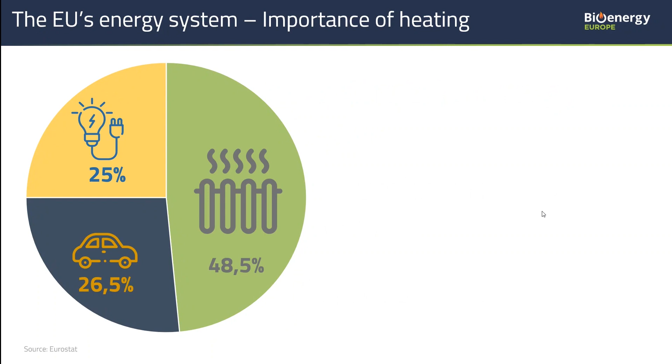The first point I'd like to make is about the importance of heating in our energy system. So, when we talk about decarbonization, the emphasis is often put on electrification and on the decarbonization of our electricity consumption. But half of our energy is actually used for heating, which underlines how important it is to decarbonize our heating sector if we want to achieve a carbon neutral energy system.

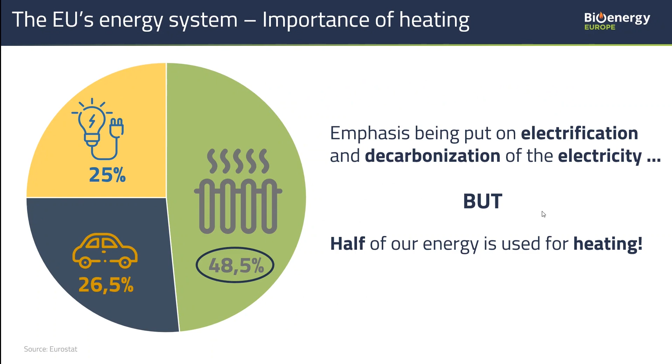Now, using this same pie chart as a central point for my next slide, I would now like to go over the current state of our energy system, meaning which fuels we're currently using to fulfill our energy needs. And these are represented by the outer circle that just appeared on the slide. And here, the darker grayish color represents non-renewable fuels, so oil, coal, natural gas, and nuclear energy.

The green color represents bioenergy in all of its forms, so solid biomass, liquid biofuels, as well as biogas. And finally, we have the light blue color, which represents all the other renewables combined, but this category mainly consists of wind, solar, and hydropower. I really like this slide because it underlines the versatile role that biomass plays in fulfilling our energy demand.

Now, if we'd like to quantify our energy system, I'm going to start with the heating and cooling sector. And there, fossil fuels are used to fulfill close to 80% of our needs, while bioenergy covers nearly 20% of our total heating demand, or 84% of the renewable mix, while other renewables cover around 4% of the heating demand. This underlines the absolute key role that bioenergy plays in the EU heating sector and how trying to leave bioenergy out of any realistic heating decarbonization strategy is totally impossible. Here on the right-hand side of the slide, you'll find a summary table with the contribution of each source to the mix.

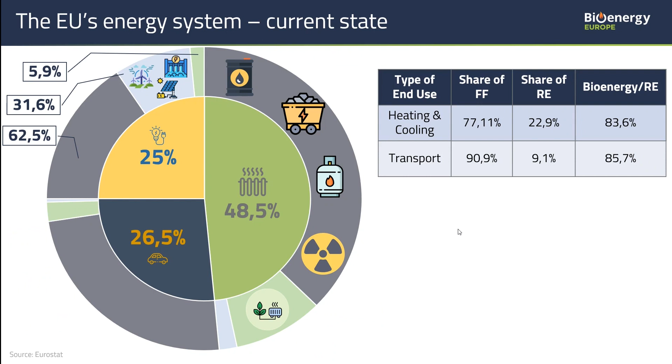And finally, we have electricity, which is the end use for which renewables represent the larger share with around 37.5%, while biomass represents around 15.4% of the renewable mix. In 2021, when considering all of these end uses combined, we see that bioenergy represents 55.7% of the renewable mix and is therefore key for all types of end uses.

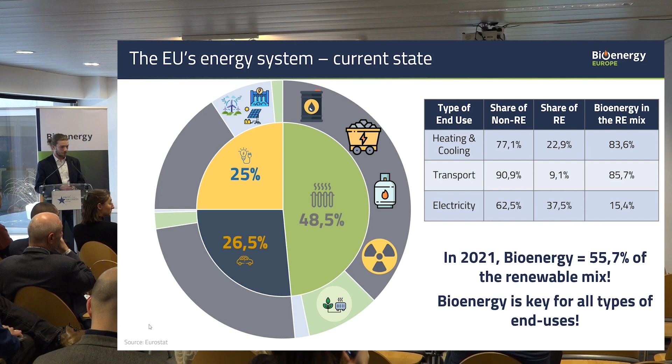I don't have to describe in a lot of detail the energy crisis that we just faced. I think every one of you is aware of the problems that we have, and also highlighting the need to have an independent energy system in Europe. And so here on this slide, you can see the evolution of the indigenous energy production for the main fuels that we use in the EU. The gray and darker colors are fossil fuels, so coal, gas, and oil. The red one is nuclear energy. The yellow are all the other renewables. And finally, green is biomass.

The first thing that we see with this graph is there is a general decrease of indigenous energy production from fossil fuels starting in 2005 already. As you can see, all of the 2021 values are below the 2005 values for most of the non-renewable fuels. And the tendency is the opposite when it comes to renewables. As you can see, biomass grew quite nicely, as well as other renewables.

And there are two important dates on this chart. The first one is 2009. As you can see, in 2009 already, indigenous biomass production overtook indigenous natural gas production. And the second one is 2016. It's in 2016 that indigenous bioenergy production overtook indigenous coal production.

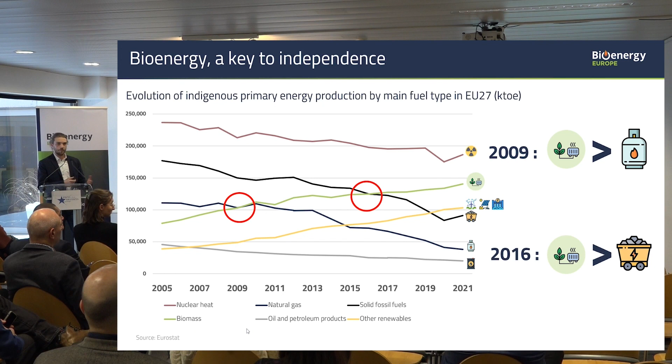And now if we'd like to put this into perspective with our energy consumption, because here we've mentioned the production, we have another representation for this. I know this is quite a packed chart, so let me walk you through this. The colored bars here represent our energy production, and the gray bar in the background of each represents our consumption. And as you can see, the difference between the two is basically our energy dependency.

And when we look at the first two bars, which are oil and gas, we can see that our production is largely outmatched by our consumption. For oil, for example, we are 92% dependent on our oil consumption. We are 83% dependent on our gas consumption. When it comes to coal, we see that we have a much higher primary production in Europe, but still outmatched by our consumption, making us 37% dependent on coal.

But the important part is now the last bar, the bar on the right, representing biomass. Here you can see that the primary production of biomass is basically around the same level as our consumption, which makes us only 5% dependent on our biomass use, or 95% independent.

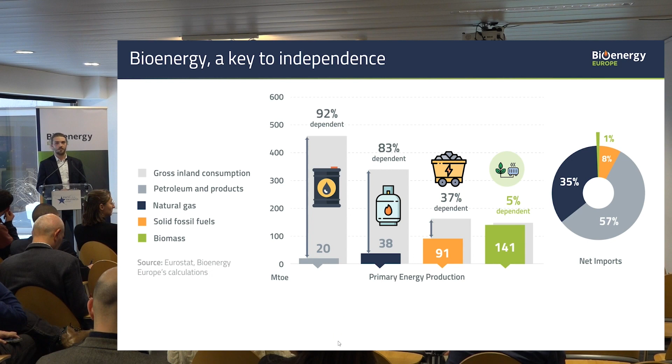And also here you have another chart appearing, this one representing our imports of energy. Here you can see that 57% of our energy imports are oil, 35% gas, 8% coal, and only 1% biomass, which is very interesting because while fulfilling around 12% of our total energy demand in Europe, bioenergy only represents 1% of our energy imports, which underlines the key role of bioenergy when it comes to the independence of the EU energy system.

But now I'd like to move on to the second part of my presentation, which is going to go into more detail on the role and the various uses of biomass for energy purposes. And I'm going to start this section by going over biomass in electricity. So as you can see here, we have a pie chart representing our electricity generation mix per product type in the EU 27 in 2021.

And as I've said before, bioenergy represents 5.9% of our electricity production mix, or 15.4% of our renewable production mix. And this might not seem like something extremely relevant, but bioenergy does present very interesting characteristics when it comes to electricity production that we are going to need if we want to achieve climate neutrality by 2050.

And this characteristic is that using biomass is completely independent of weather conditions. So unlike other renewables like solar and wind, which unfortunately do not produce any electricity if the wind is not blowing or the sun is not shining, bioenergy can provide constant electricity without any intermittency.

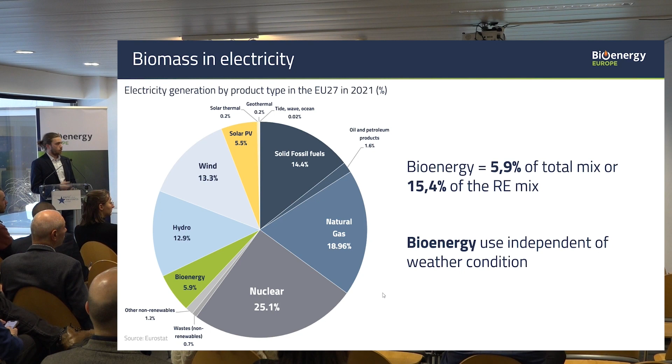And also an additional point when it comes to biomass in electricity: when we compare the type of installations in which we generate the electricity, we see that for a common fossil fuel like coal, for example, only 29% of the fossil electricity that is being produced is produced in combined heat and power units.

While when we look at the biomass share of electricity produced in combined heat and power units, this goes up to 74%, meaning that 3/4 of the electricity that we produce from biomass also produces heat that can then be re-injected and serve the needs of multiple users like households or commercial and public services buildings through district heating systems, for example.

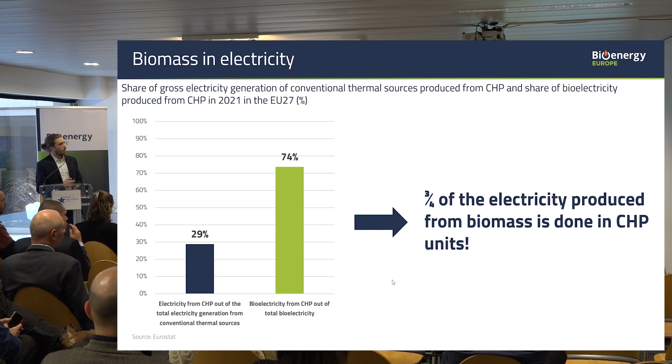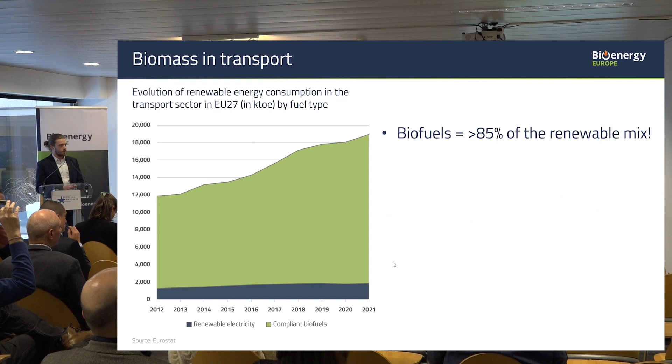And it also presents some very interesting characteristics which make it extremely important for the future energy mix: certain hard to abate transportation modes can only be decarbonized at large scale through the use of biofuels. And those are aviation and maritime transportation, which unfortunately cannot really be easily electrified.

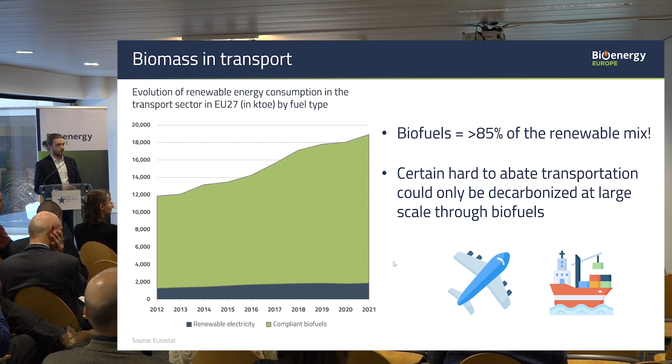And last but not least, we have the use of biomass for heating purposes. This is where bioenergy, let's say, shines the most currently. So when we look at our current heating and cooling mix, we see that more than 3/4 of it is still non-renewable fuels. Biomass makes up 19.1% of this mix, and other renewables 3.8%, which brings biomass to 83.6% of the renewable heating mix.

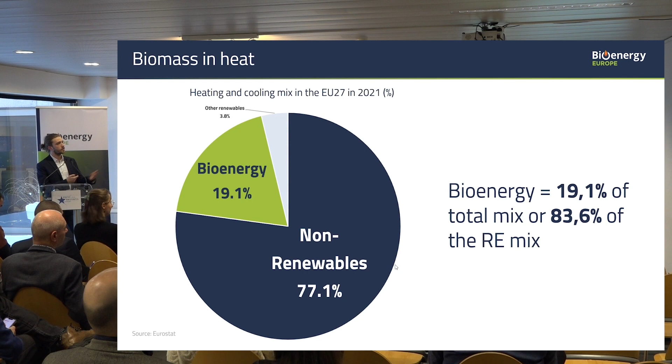And when we look now at who the end users of this bioheat are, we see that half of the bioheat that we produce is consumed in households in direct use, so through wood stoves, pellet stoves, etc. And 1/4 by the industrial sector, and 1/5 by the district heating sector, serving the needs of other end users by re-injecting heat through district heating systems.

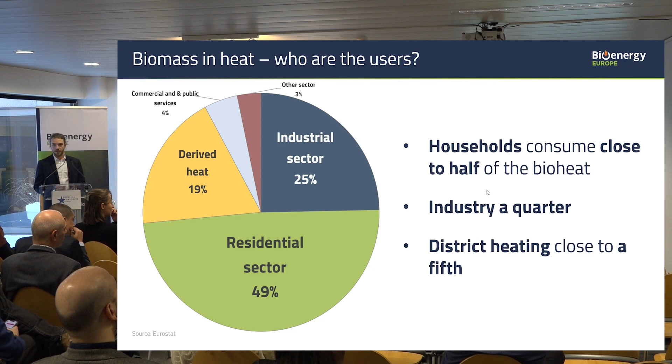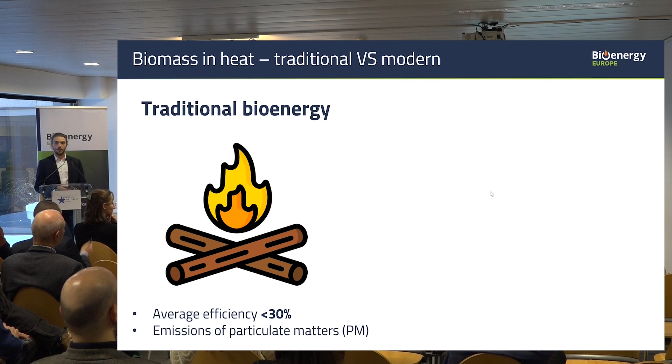And when we talk about the use of bioenergy in the residential sector, I have to make a clarification about the different types of uses that we have. It's the question of traditional bioenergy use versus modern bioenergy use. So when we look at traditional bioenergy use, mostly open fires, we have an average efficiency that is extremely low, under 30%, and we have emission of particulate matter.

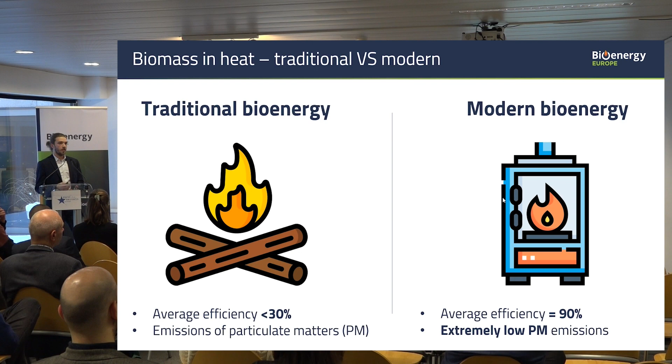But on the other hand, and this is what we promote at Bioenergy Europe, when we use bioenergy in recent appliances, we have an average efficiency that is around 90%, with some variation, of course, depending on the type of installation, and also extremely low particulate matter emission, which makes modern bioenergy really a perfect type of appliance for households in the future. And now let's go over the advantages of using biomass for heat.

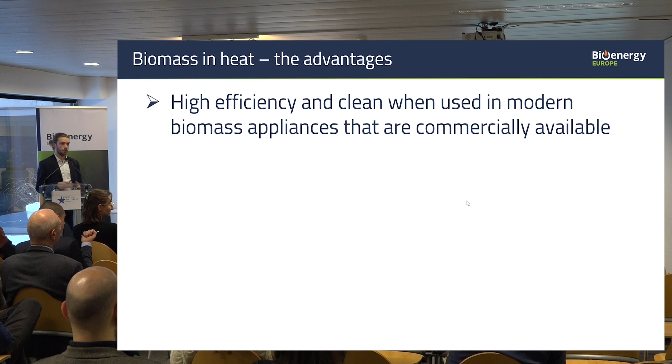So as I just said, using biomass in modern appliances is a very efficient and clean way of heating your home. And those solutions are commercially available. We don't have to wait in order to transition from traditional biomass to modern biomass. All of these solutions are commercially available.

Biomass for heat can also be a standalone off-grid solution for remote areas that don't necessarily have a perfect connection to any types of grids, and can also help relieve some grid pressures, especially the electrical grid, when it comes to high demand times. Indeed, grid pressures or grid technologies have been identified as one of the largest bottlenecks of decarbonization in Europe. And we do start facing those issues, and the use of biomass for heating, especially in the winter, can help relieve some of the grid pressures.

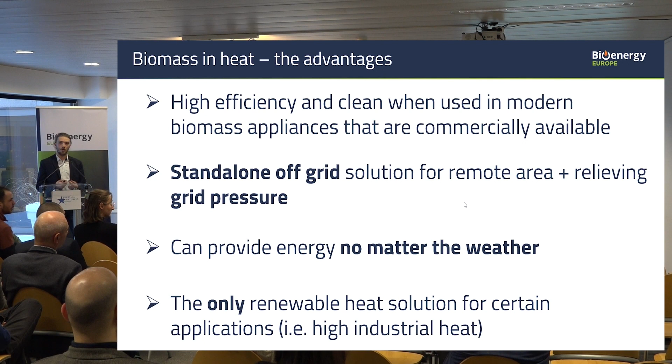As I said as well, using biomass for heat provides energy no matter the weather. So it's not an intermittent source of renewable heating. And it's also basically the only renewable heat solution for certain applications, especially industrial ones. So high industrial heat, such as in the lime or the cement industry, for example.

But we do acknowledge that some of the uses, like, for example, using biomass in traditional bioenergy appliances, is not the way to go. So we do have some opinion on what the way forward should be. And the first one is that there is a need for policies and incentives for the replacement of those outdated, inefficient, old appliances with new ones.

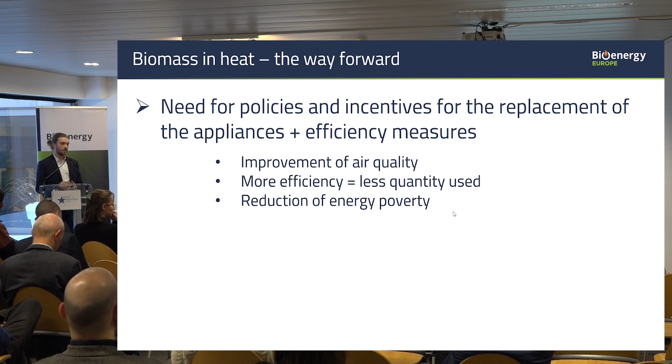And also we need some better efficiency measures, because those would not only help improve the air quality by reducing the amount of pollutants that can result from poor quality fuels used in open fires, but also if we have more efficient appliances, to produce the same amount of heat, we need less biomass. And this then also helps us a bit on the supply side. And also it can help us fight energy poverty.

Here, as an illustration, this is the distribution of houses per energy source and per income class in Hungary. And here what I want to show is that, first off, income class 1, on the left side of the slide, are, let's say, more sensitive, poorer households. And income class 5 is, let's say, richer households.

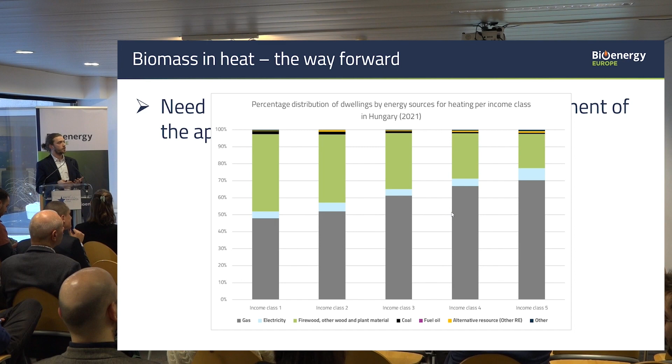And as you can see, the contribution of wood is extremely different depending on the income class. So in income class 1, firewood is used in basically half of the houses, while in income class 5, it's only 1 out of 5. Therefore underlining the crucial importance of biomass in heating for sensitive and poorer households.

Also, we need a better recognition of biomass and the role it has to play in the future energy system if we truly want to reach climate neutrality by 2050. And we also need a better consideration of the needs of the end users in future policies. I can speak from experience here.

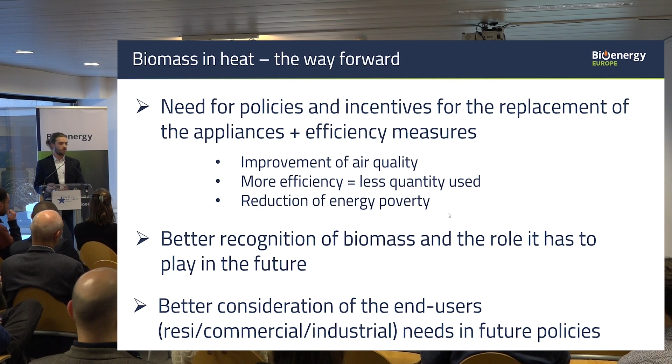I've attended multiple projects, especially on industrial decarbonization, and sometimes it seems that there is a bit of a mismatch between the expectations of the industrial players that have to decarbonize and the people making the regulation behind it. So we really need to make sure that these are aligned in order to make efficient policies.

Now let's move on to the third part of my presentation, which is going to be a conclusion and some key messages. So the first one that I hope all of you got is that most of our energy demand is actually for heating purposes. And therefore, this cannot be forgotten in any of the decarbonization talks. We do need to address this issue of decarbonization of the heating sector.

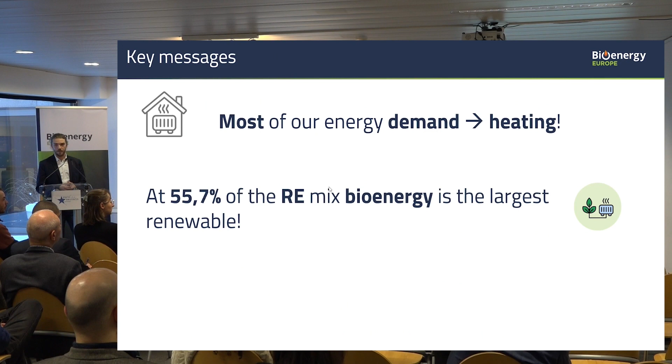At 55.7% of the renewable energy mix, bioenergy is by far the largest renewable energy source in the EU. And also, it's a local resource that works towards the EU's energy independence. Also, biomass and electrification are complementary and not competing against each other.

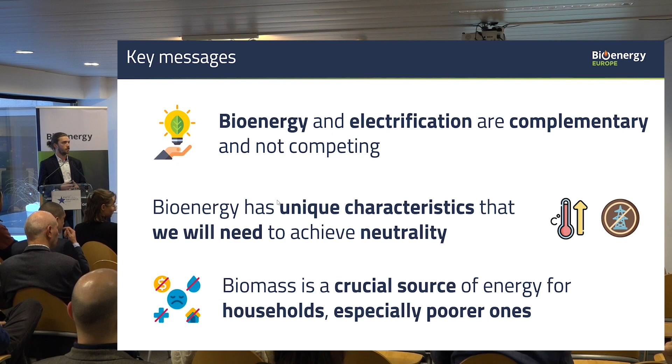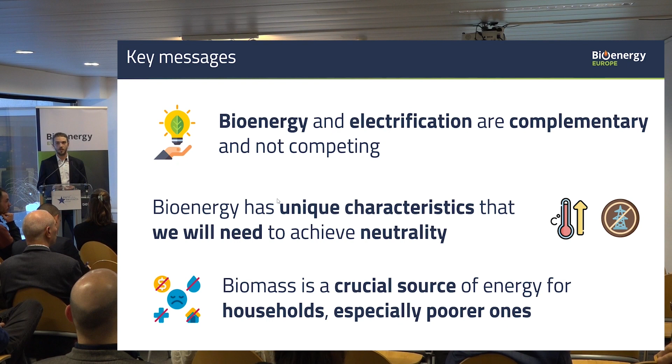And bioenergy also presents some unique characteristics that we will need to achieve true climate neutrality, like being able to provide high heat for industrial needs, or being able to work without relying too much on the grid. And last but not least, biomass is a crucial energy source for households, and especially for more sensitive and poorer ones who don't necessarily have the capacity to react financially to an energy crisis.